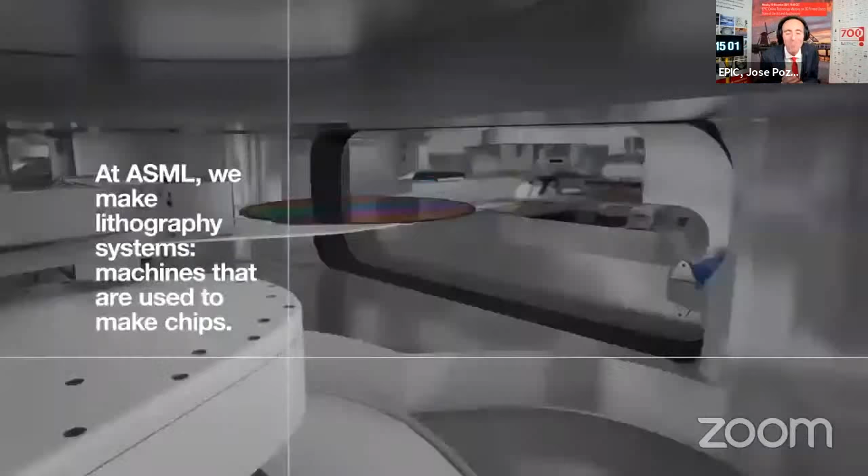ASML is the biggest success story in Europe in equipment manufacturing for semiconductor production. If you want to see how they took the market away from Canon and Nikon, I recommend watching this video. But today, I want to tell you about what I believe will be the next success story in manufacturing equipment, and that is 3D printing of optics.

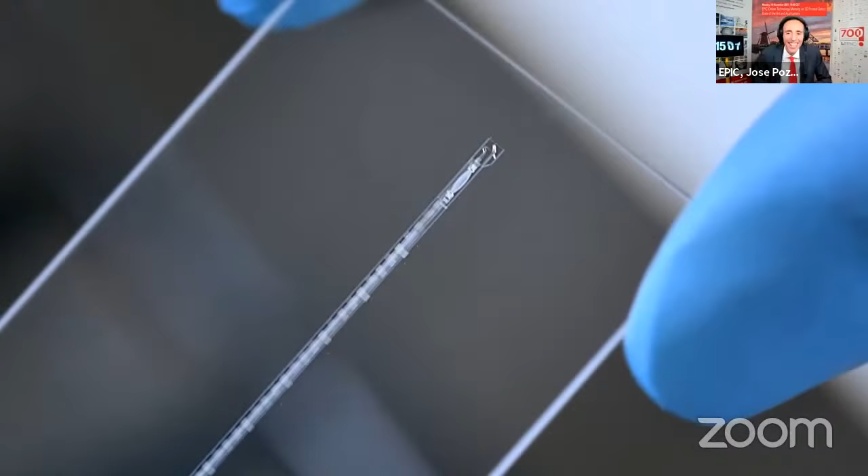Creativity is indeed the engine behind technological evolution. Wise words from FEMTOprint CEO Nicoletta Casanova. The trend in smart devices is smaller, cheaper, with an exponential increase in complexity. It's done by integrating fluidics, optics, mechanics, and electronics into a smaller volume.

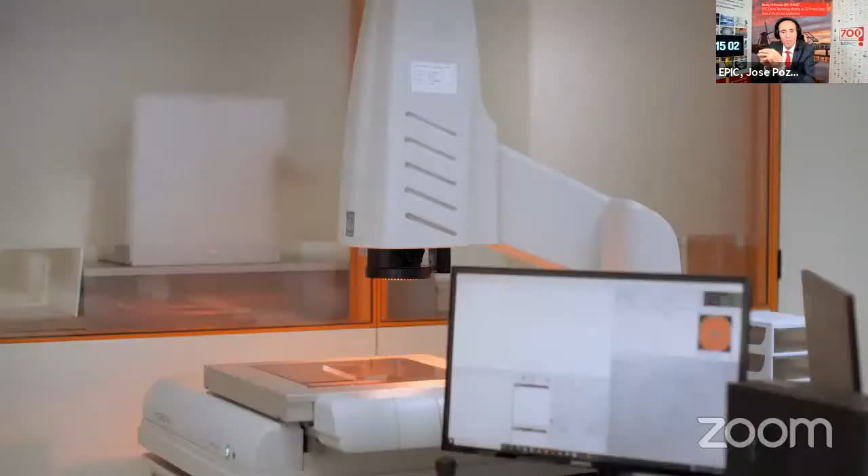But there is a paradox. To produce small things, you need large, high-maintenance infrastructure. Up to 95% of the energy budget of a clean room is simply to control the air. That's incredible. Or maybe not.

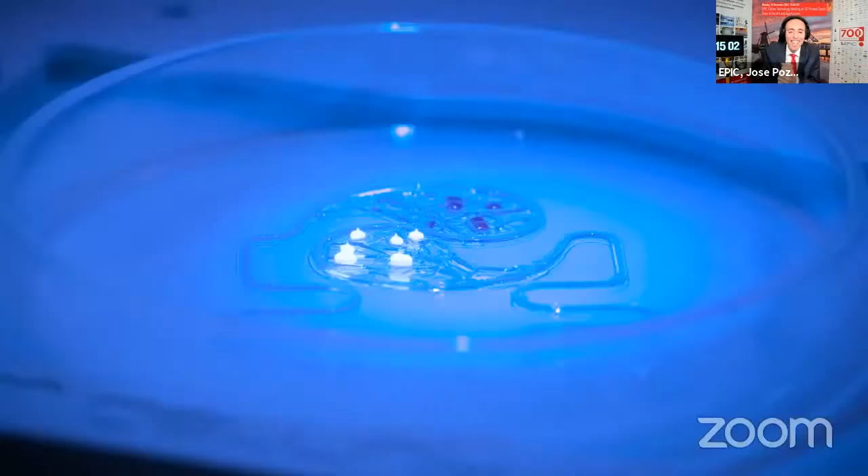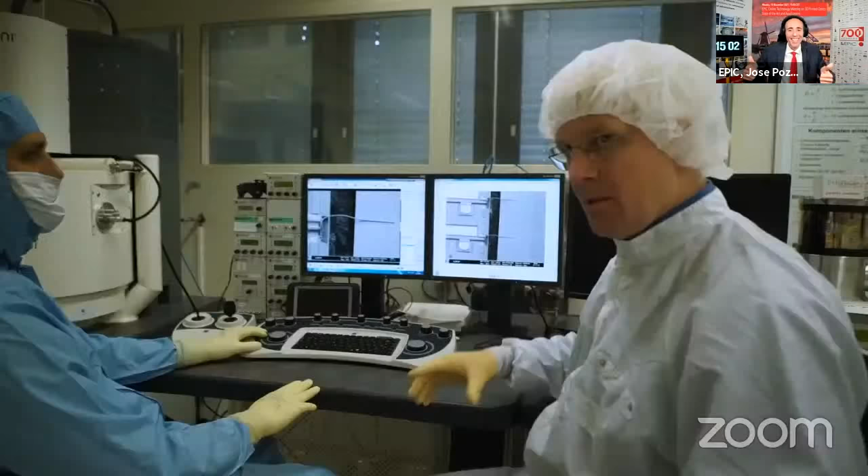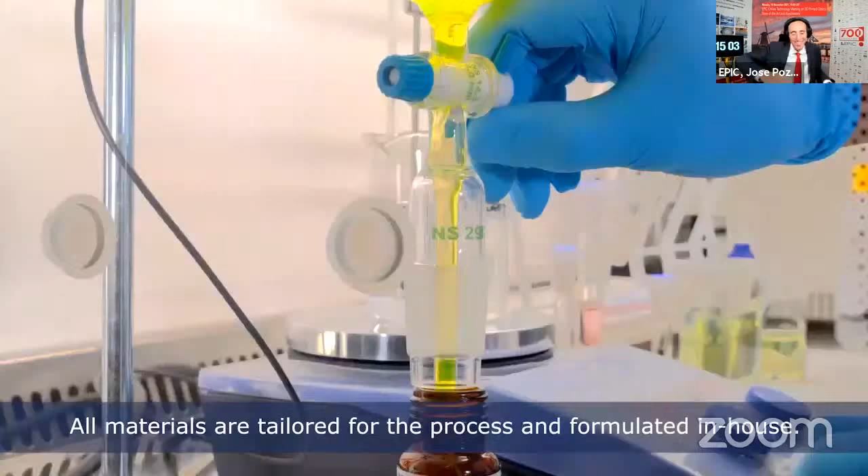On Monday, November 15th, we address the booming field of 3D printed optics. And it really is booming now. Nanoscribe was acquired by CELLINK, a pharmaceutical bioprinting company. Multiphoton Optics was acquired by Heidelberg Instruments in a smart move, having both additive and subtractive manufacturing for microprinting of optics under the same roof. Vanguard Photonics, thanks to the collaboration with Picontech and the PIXAPP pilot line, moved the technology forward for the packaging of photonic integrated circuits, and even newcomers such as the Austrian UpNano have attracted major interest.

And when it comes to ophthalmic optics, another huge breakthrough happened in Europe in 2021. Dutch company LuxExcel started production of 3D printed prescription glasses. Today they are the only company in the world that can do this.

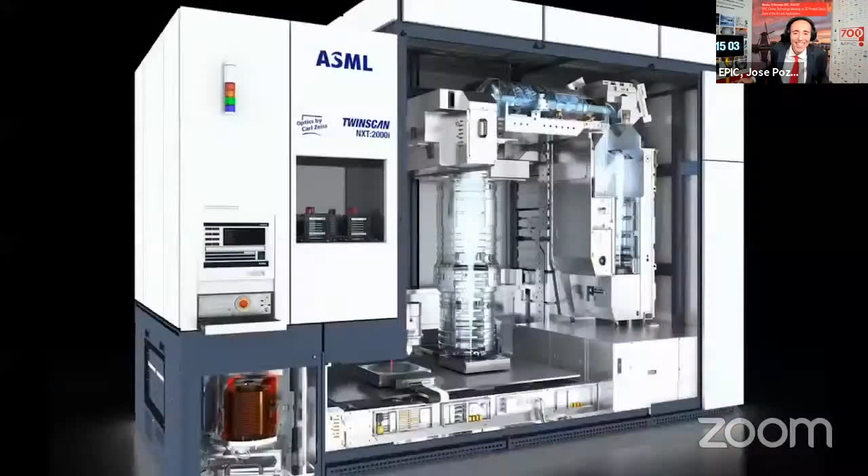But in the same way that ASML's success story was built around cooperation with strong partners, think about the TWINSCAN, the immersion process, or the early move to extreme UV, these companies in 3D printing optics also need powerful partners to enable the next generation.

And here are some of my thoughts. In the two-photon polymerization process, there are two secret ingredients in the recipe: the polymer material and the femtosecond laser used for locally scribing the structures. Tunability of the pulse length and accurate beam shaping have been always items in their Santa Claus Christmas list.

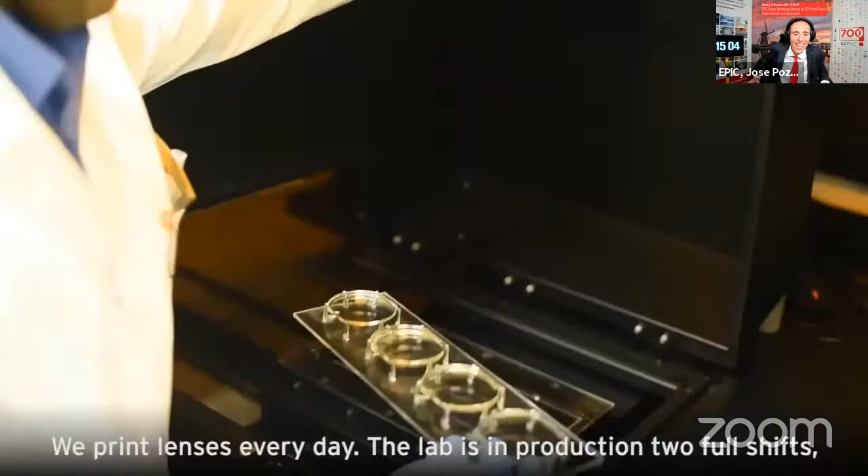And for the 3D printed optics by LuxExcel, part of their success is because of the smart integration with electronics. Look at these electrochromic lenses turning your glasses into sunglasses instantly. Or the integration with augmented reality enabled optical waveguides, so you can have for the first time prescription glasses with augmented reality. Partners are essential for success, and when industry needs partnerships is when EPIC really is epic.

Do you need faster turnaround time, regional production, or prototyping of optics or micro-optics? Do you want to propose your photonic technology as enabler of this success? Do you want to integrate your electronics or fluidics with the next generation optical elements? Or do you want to invest in the next big thing in manufacturing equipment?

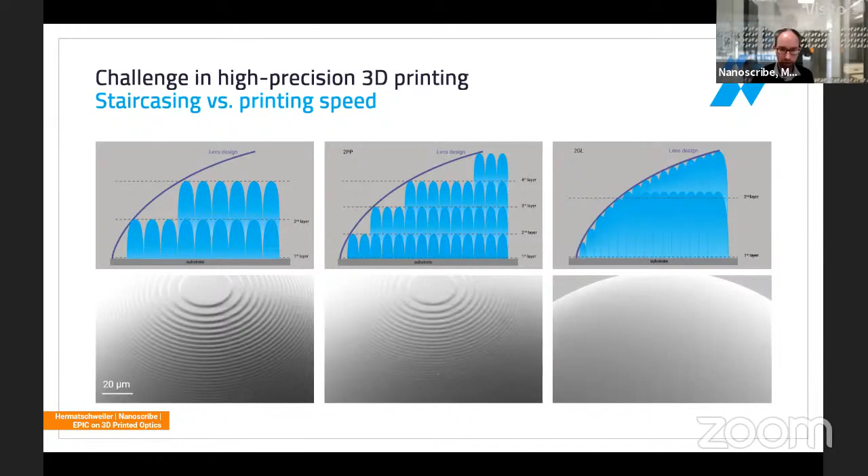This reduces the print time excessively, and results in optically smooth surfaces. You can, for instance, get rid of concentric rings that you typically find when you slice an object, if you have a hemisphere in the center zone, which is the most important zone of a micro-optic. For two-photon grayscale lithography, you can completely get rid of it, resulting in baby smooth surfaces, sub 10 nanometer surface.

So there are 2 topics I would like to talk about today. Mastering of micro-optics is of specific importance - not just 3D printed micro-optics, but also 2.5 dimensional surfaces. The design freedom translates into superior performance because of high design freedom, like higher filling factor, sharp edges, smooth surfaces, and at the same time, you can also realize hybrid optics, so diffractive and refractive combined.

Not only can you do this on wafer level, but you can also do it well aligned on fiber tips, on chips, or on the wafer. Because it's so easy to use, and in most cases you don't even use spin coating and other complex processes, you can realize prototypes easily, iterate fast, and the few process steps involved result in high quality structures, high yield, and great performance.

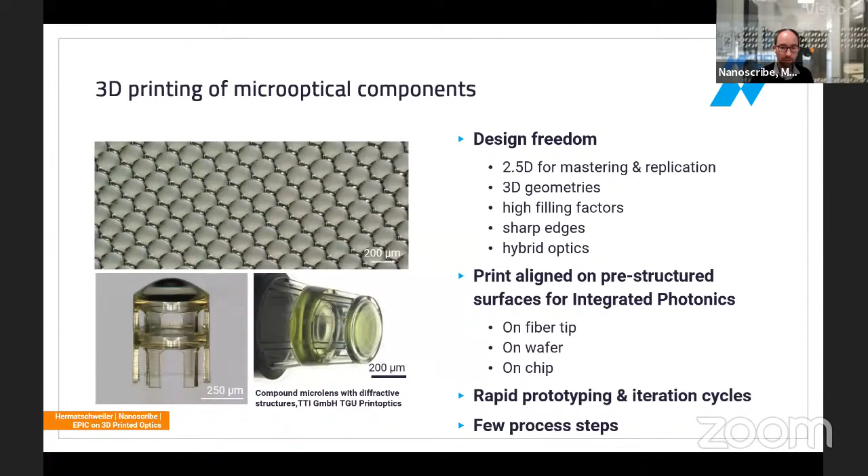So I have brought 3 examples with me. On the left side, you see such an arrangement of a hybrid optics. It's a hemisphere, and on top of it you see fine ripples that diffract the light. Or you can even go beyond the economical compromise of diffractive optical elements, where you typically have only 8 diffractive optical element levels. In our case, due to the superior design freedom, you can go to more than 4,000 levels.

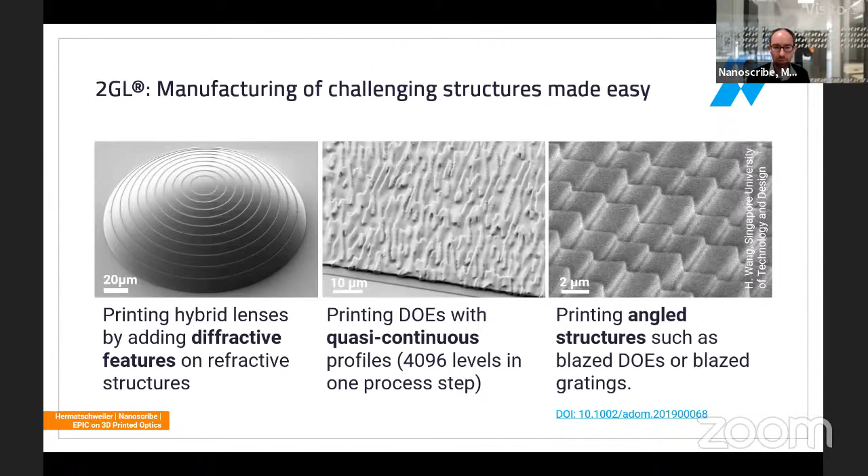This then results in quasi-continuous profiles. Or you can even implement a certain designer angle in order to get rid of the 0th order of diffraction - so diffractive optical elements which are blazed.

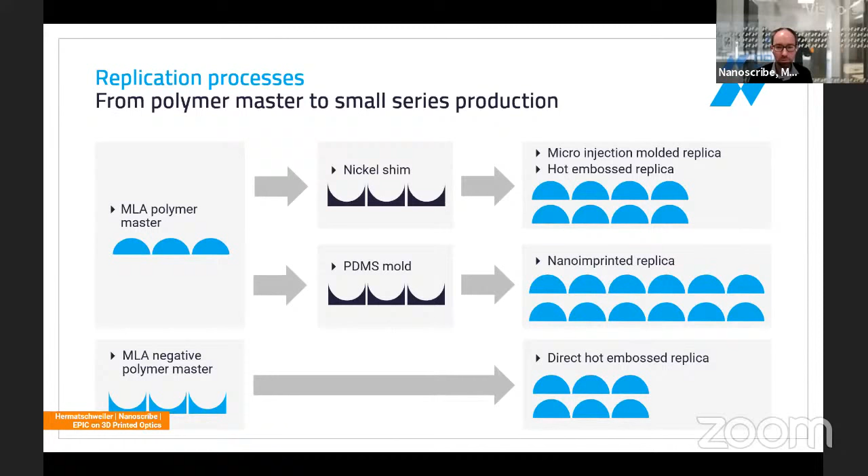This has been done in collaboration with EVG as collaboration partner. This is based on nano imprint replication.

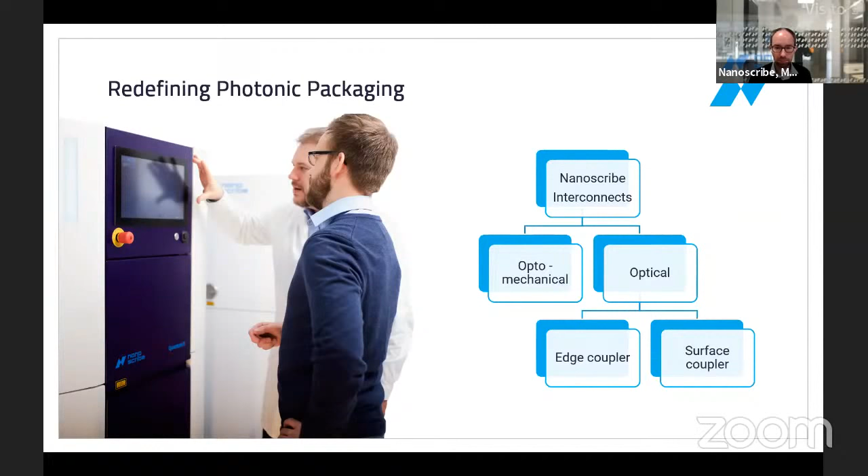The second aspect is not just printing on wafer level, but printing optical devices at the point of destination for photonic packaging. Here Nanoscribe provides 2 major routes. One is to print optomechanical aligners so that you can easily click, for instance, a fiber optic to a certain mechanical alignment element, or you go the optical route and print the optics at the edge of a chip or at the facet of a fiber or onto an optical chip at the top surface.

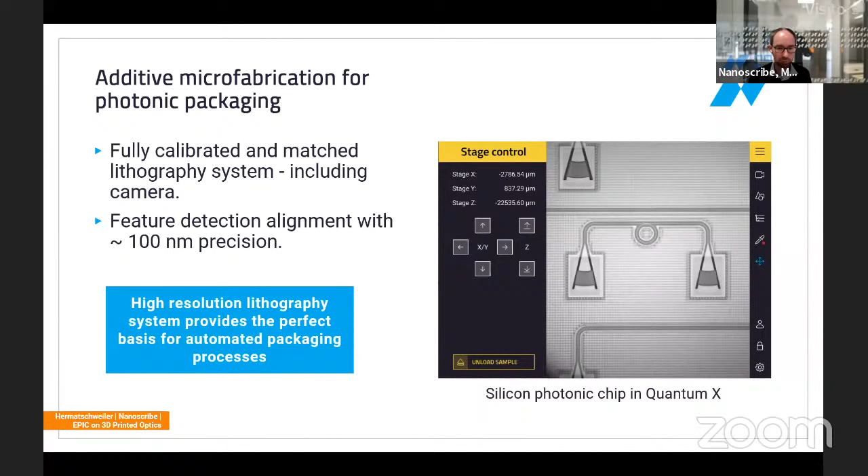This is how it looks like if you take our Quantum X system, the 2-photon polymerization maskless lithography system and 3D printer in one unit. You can see in the camera directly where you want to print, and the alignment allows you to precisely anchor your structure with ±100 nanometer precision to the point of destination. So no complex gluing - it's just printing at the point of destination.

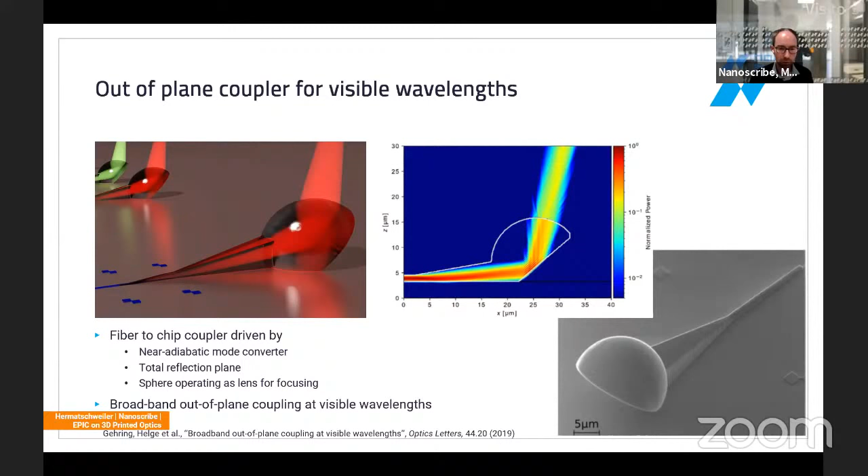One example is from customers from the University of Münster, the Wolfram Pernice group. They, for instance, print things like complex taper structures in order to couple light into this waveguide. Then they have a total internal reflection that reflects the light out of plane, and then a focusing hemisphere with 8 micrometer radius that focuses the light into an optical fiber or vice versa. This is very broadband - it spans the complete visible range at low losses.

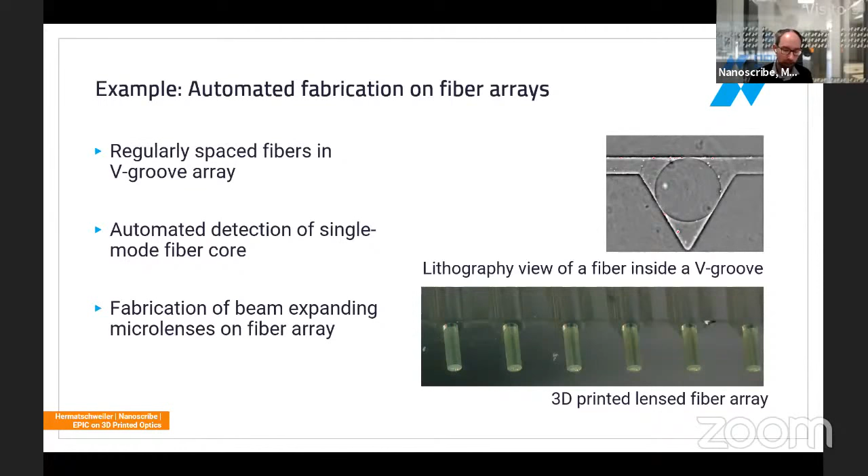Or you can print on fibers and fiber arrays. Here you see a V groove, and our system allows for automatic recognition of the fiber core, alignment, and printing thereof in order to print micro-optics, which relax the mode field diameter.

So to summarize, with Nanoscribe you have the ability to do two-photon polymerization additive microfabrication for micro-optics, which results in superior performance, the ability to rapidly prototype, in a robust and cost-saving manner, and it's also mass scalable by nano-imprint lithography and injection molding.

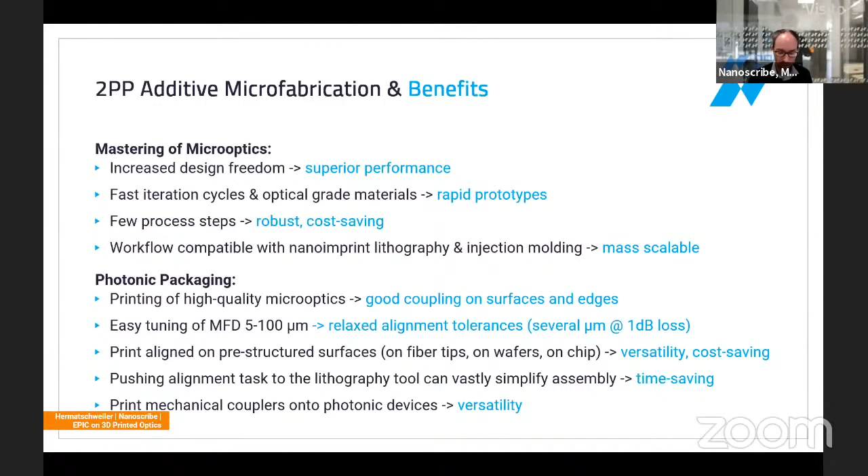And in photonic packaging, you can achieve good coupling efficiencies on surfaces and edges, with relaxed alignment tolerances enabled by larger mode field diameters resulting in low losses and high coupling reliability. It's also versatile - our products allow printing not just on wafers, but on fiber tips and chips. It's also very time-saving, since you can completely skip alignment and gluing tasks. It's a very versatile technology, and if you wish to evaluate it, please send us an email with your design ideas for a feasibility study.

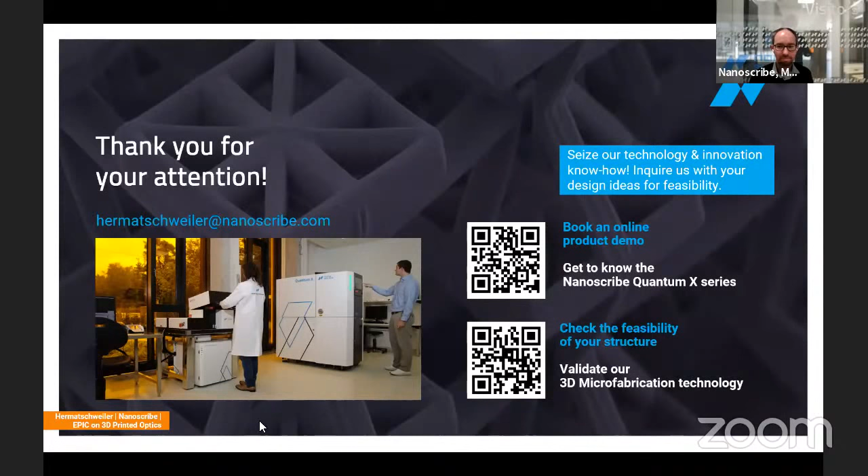Hello, you are one of the people I look up to the most in this industry. It is amazing what you are doing. I want to bring EPIC members in contact with you so it can help you do even better. So you're prepared for this - the EPIC question: what are your new challenges? What can you do for the others, and what can the others do for you?

So what we can do for others is feasibility studies. Whenever you have something you'd like to evaluate, please come to us - do not hesitate. If you're a photoresist manufacturer with specific materials, please consult us, we would love to test your materials. What we can do for you is print micro-optic masters for innovative replication techniques - if you have anything you'd like to test, we print it for you and you can test the replication. Or we can print complex micro-optics to qualify your measurement techniques, for metrology instrumentation for instance.

We have many people in the room I want you to meet, but I'm going to start up there, on the space market. We have one of the companies making a difference in the industry for space technologies - Leontios, representing Leo Space Photonics. I wanted him here because in previous meetings we talked about optics for FSO, free space optical communication, and he's one of the key companies in the nanosatellite business bringing that industry forward. Today, Leontios, we are talking about 3D printed optics - what is your interest in that topic, and what challenges do you have for your space applications?

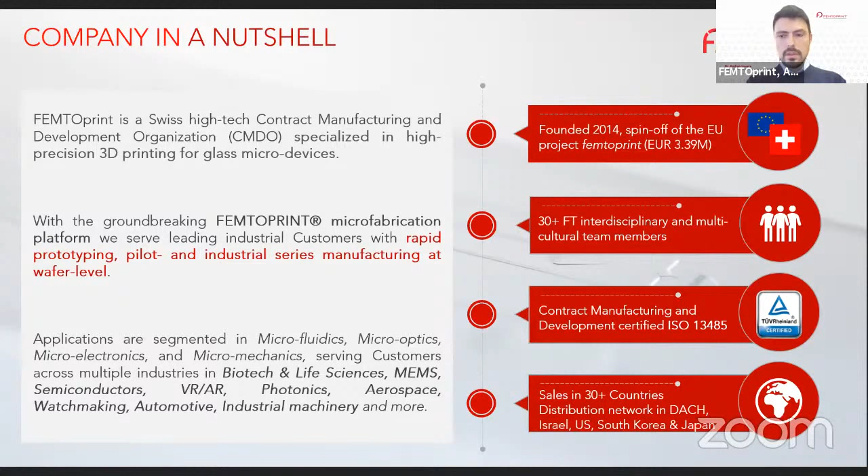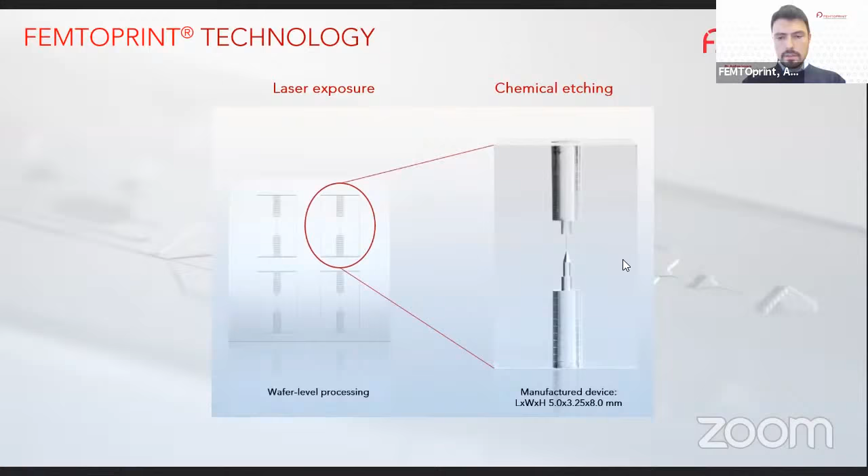Our main material for optics is fused silica, and there are many advantages for using fused silica in optics. For example, it's UV transparent, and there's a transparency window which goes very nicely into the IR. It's stable, can go into very harsh environments, is biocompatible, therefore elements can also go into a human body or be used in lab-on-chip applications, for example.

And the fabrication can, of course, be done at wafer level scale. Here we see an 8-inch wafer. These are just holes, but in the same area and surface we can basically produce any type of components. What is also, I think, amazing of what we do is that we can achieve very, very thick parts. Here we can reach 20 millimeters in thickness.

Aside from the main technology, we have built over time many other post-processing methods that help us tackle different markets, like a surface polishing method that allows us to really reach the optical market by improving the surface quality of the produced components. Then we have encapsulation technologies, we can modify the refractive index of the materials, drill holes. And more recently, we are also handling metals to create electrodes in 3 dimensions and other types of functionalization through partners.

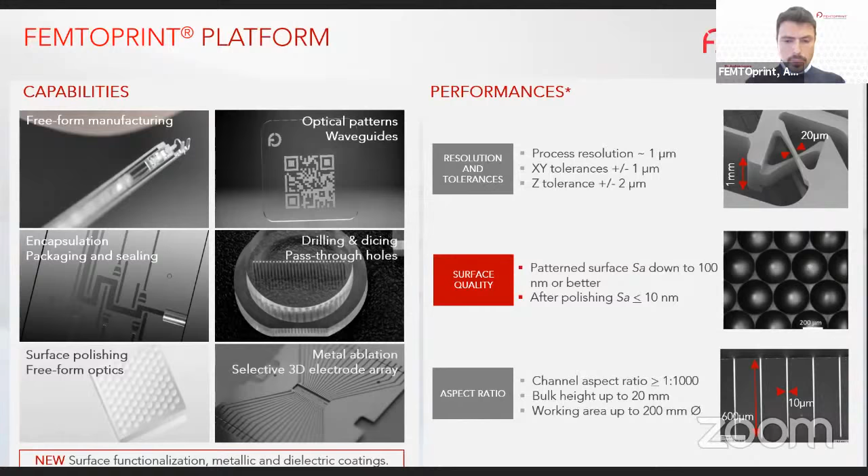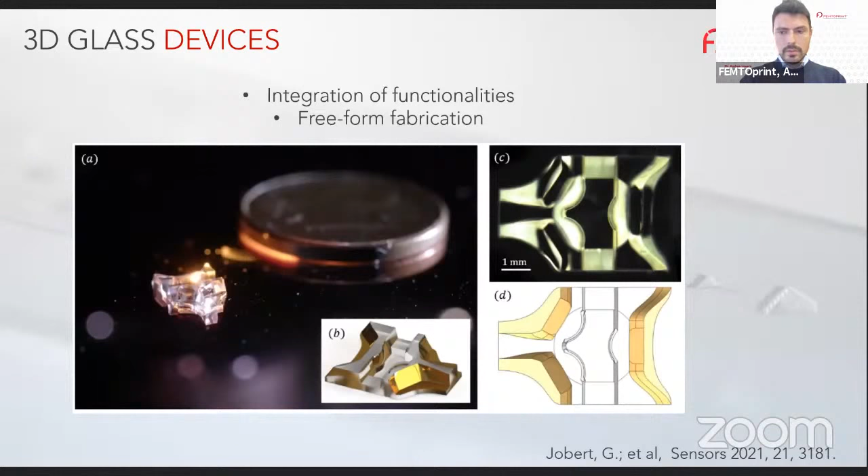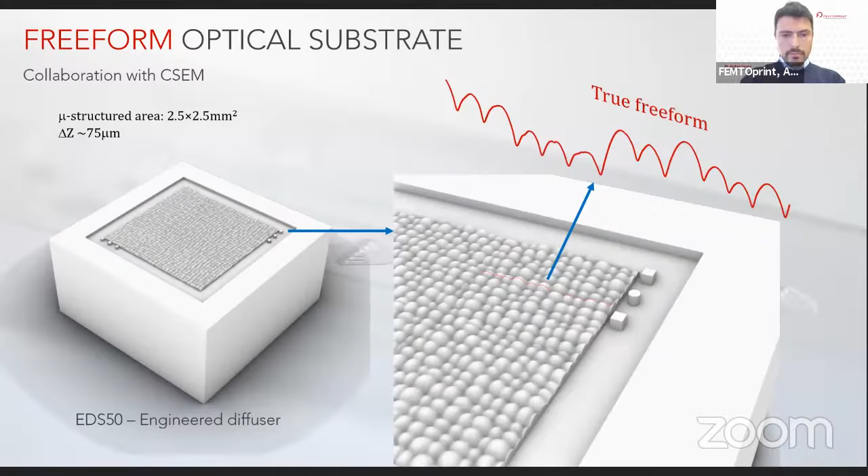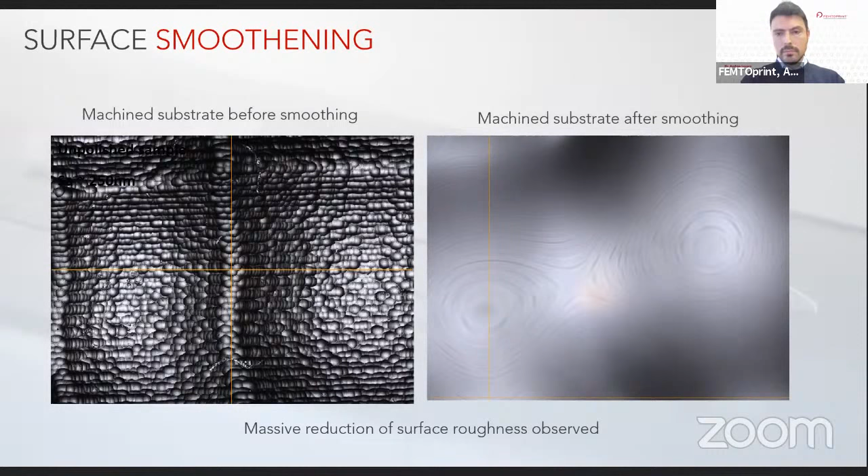So because I knew you were going to ask the question, what can you do for us? I think we are really looking from the market. We are really looking for partners to bring ideas and devices to the table to develop together with us.

What we can bring is our expertise in producing components from micrometer to several millimeter size. We are comfortable working with typical feature sizes between 20 microns and 1 millimeter. We can decrease surface roughness below lambda/10, average roughness below 20 nanometers. We can keep shape accuracy below 1.5 micrometers compared to the 3D model. And we are comfortable producing curved shapes using our localized polishing process.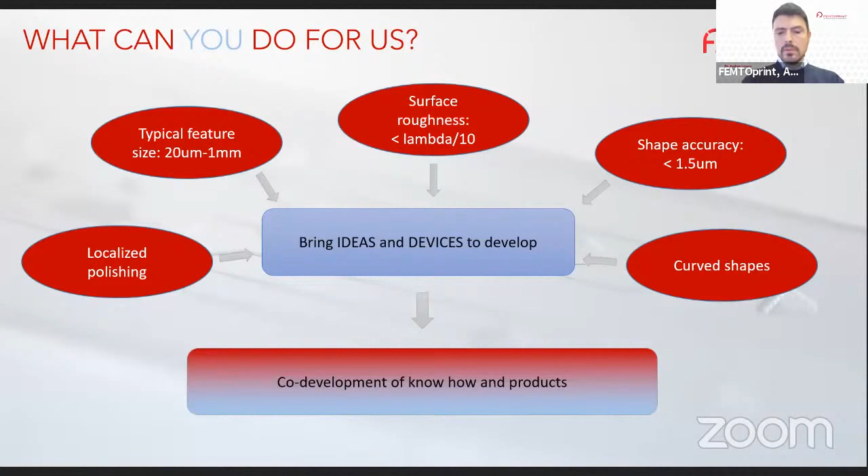What we really hope at the end of this meeting, but also for the future, is to find good partners and customers to co-develop know-how and new products.

And what can we do for you? We offer a flexible 3D technology which allows us to operate in different markets. Our main offer today can go from fabrication of masters - I think we heard a lot about masters in the previous presentation. We have demonstrated with a few selected customers that our technology is compatible with replication for injection molding machines and other technologies. But at the same time, we can offer fast prototyping, small volume production, up to mid volume production of optical components and other items.

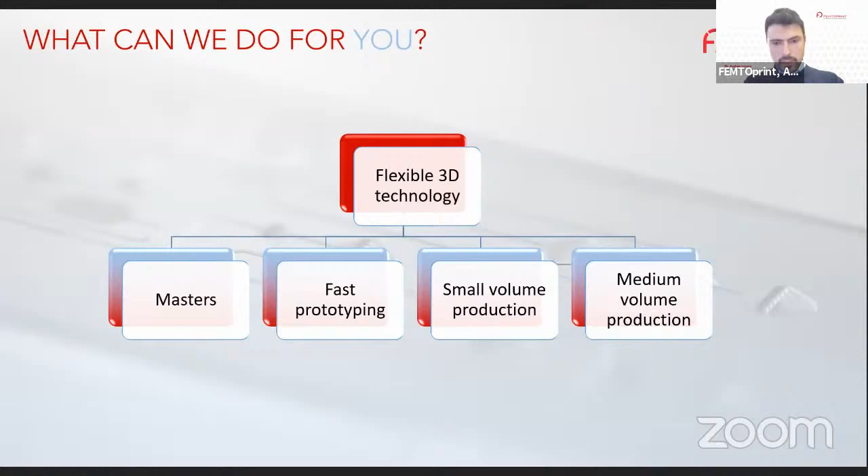And with this, I'd like to thank you for your attention.

Thank you very much for a great presentation. I'm still puzzled about when to use glass and when to use polymer. To be honest, there are so many industry trends that it's hard for me to summarize in a sentence. I don't think there is a clear answer for that. Luckily, we have lots of different end users with different challenges when it comes to what material to use.

So I want to bring to the attention a few end users that we have in the room. I'm going to go first to MBDA. Kwong Man, good afternoon, all the way from the UK. MBDA is a company in the defense sector. We all know the company MBDA, and you know what your business is. What is your interest in 3D printed optics? And when do you target polymer or plastic, and when do you target glass as the material for those optics?

Hi. And if you have any slides to share with us, now is also a good time. Yes, I'm just going to share that. I've only got a single slide, but hopefully you should be able to see that right now. Can you see that? Let's see. Yes, go to slideshow mode.

Excellent, okay, that's brilliant. So MBDA's interest in metamaterials - we've only started engaging with you guys on metamaterials recently, but briefly, MBDA is a European complex weapon prime.

My name is Kwong Man, and I'm the EO sensors technical expert at MBDA. MBDA is the primary missiles company in Europe. We use imaging infrared technology predominantly in missile seekers, but we're also interested in the technology for signature control. As we develop systems for the future, the requirements become more demanding and require increased design flexibility. This could be to fit into smaller spaces where the overall size of the missile is reduced, or to fit into unconventional spaces, as in the case of multi-mode seekers. Metamaterials can help us deliver this challenge, as they have the potential to reduce the number of lens elements and operate in confined spaces.

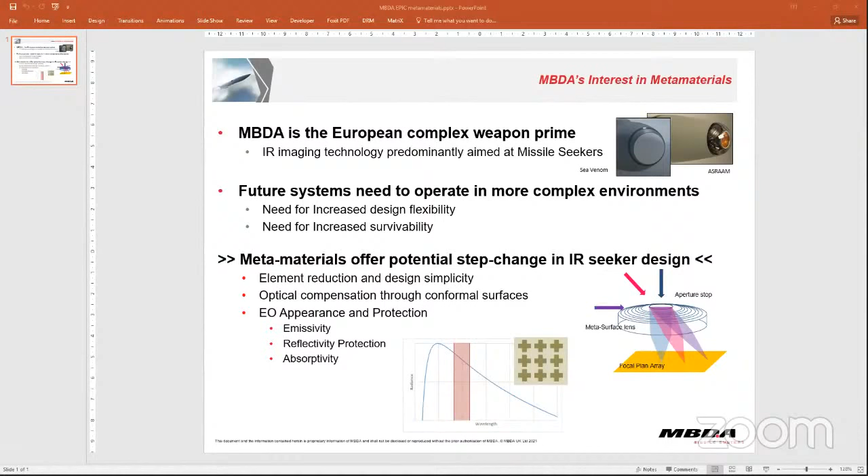These are the fields that the EO Sensors department imagine that metamaterials can provide some benefit for in the future. There may be other areas that metamaterials could be applied in other technologies and departments.

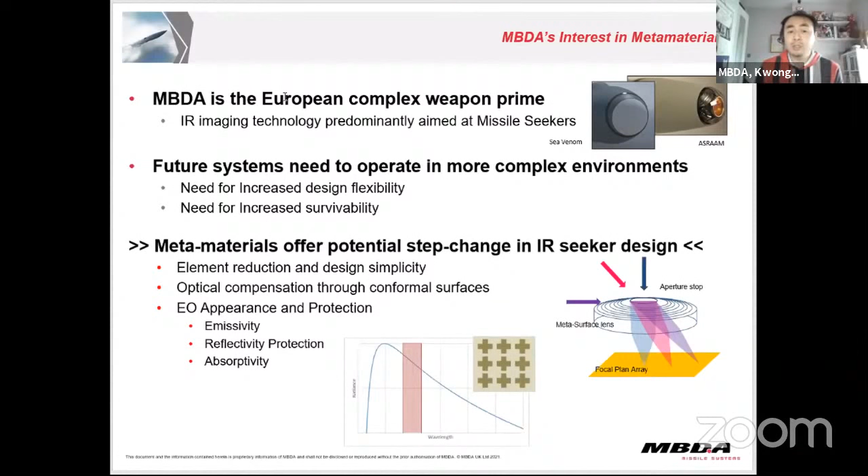If you have any thoughts about this or any questions, you can contact me directly. That's all I had for now. If you have any other questions, please let me know.

Well, you have a lot. I love when an end user comes to the meeting with a particular challenge.

Who can help? Let me see. I have some hands up. James Field from Nanobox, how can you help?

Well, we've made imagers for missiles where we've printed right on the image sensor itself. That was field trialed, going through shock and vibration, the heat, humidity, so that they're used in the services, or beginning to be used in the services over here. And we do control permittivity of material sets for cloaking radar images and the like.

So I will send you some presentations, Kwong. Please, that'd be great. Thank you.

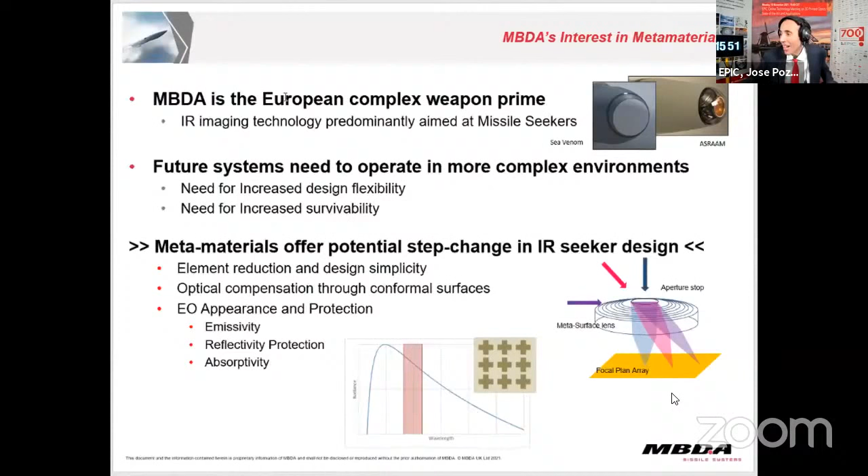I think many of you are already telling me that they want to help, but they don't want to talk publicly. So I think it is okay that we leave this as introductions offline. I know that the topic is the defense, and it's better to have the introduction and discussions offline. So don't worry, I know many of you want to help. Let's do the introductions later.

I want to comment, I want to bring to the discussion, because we have a person from the automotive sector. We have Lionel Guillot. He told me it is too early to speak about my challenges. So I just want, because this is, of course, a meeting, not a webinar, I want Lionel to say hello to us, and I want to ask him what brought him to this meeting.

Lionel Guillot representing the automotive company Renault. Lionel, good afternoon. Hello, good afternoon. Thank you for giving the micro. Just to say, this is an early participation today.

My interest is for functional surfaces, whether it's for optical aspects or photocatalytic aspects, and any aspect that we could imagine in a car for functional surfaces.

So today I'm learning, I'm listening and learning to you, and that's very interesting. I thank you a lot for these speeches. Thank you very much, Lionel, for that.

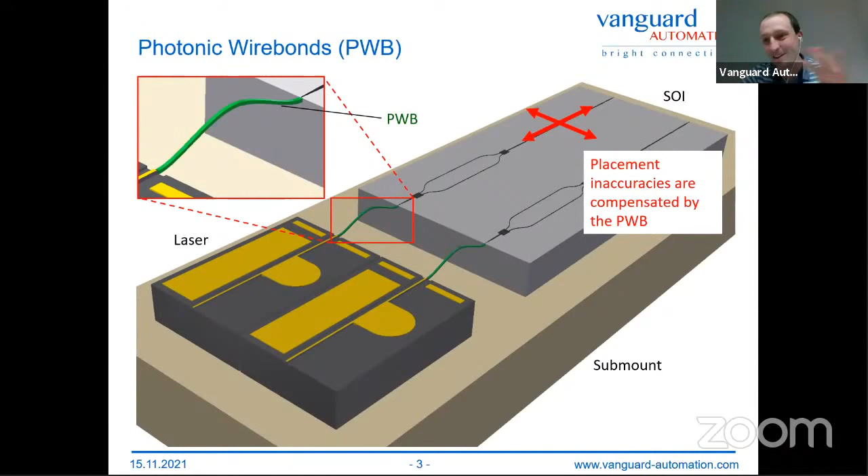In a subsequent step, we clad these interfaces with a low index polymer. That's first of all for single mode operation, since all we do is single mode operation, and secondly to be reliable and pass Telcordia tests and so on. I'll talk about this again at the end.

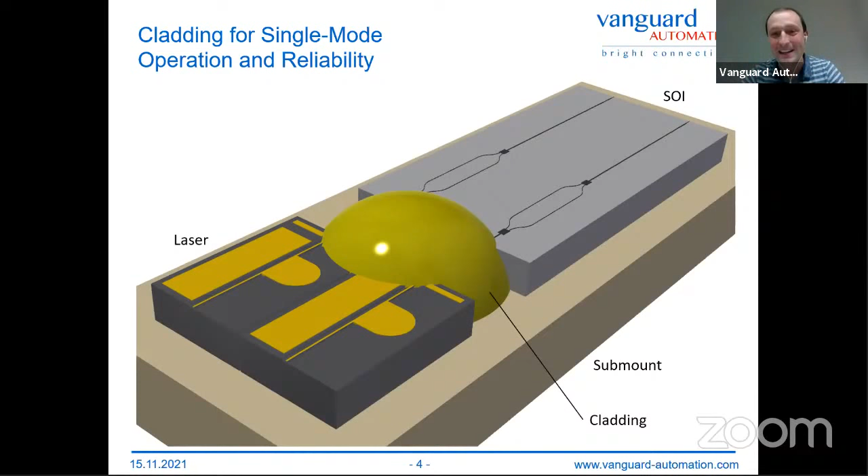So how does it work? This is the engine of our process, but it's just a small part of it. It's a 3D printing process, also known as two-photon polymerization. What we do is take an objective lens up here, and we have a femtosecond laser beam that can focus into resist and polymerize it.

With this objective lens, we look at our laser and our chip, and localize it with sub-100 nanometer accuracy. We automatically calculate the trajectory that connects these two chips, and then the machine does everything else itself. That can happen in quite attractive cycle times for many applications.

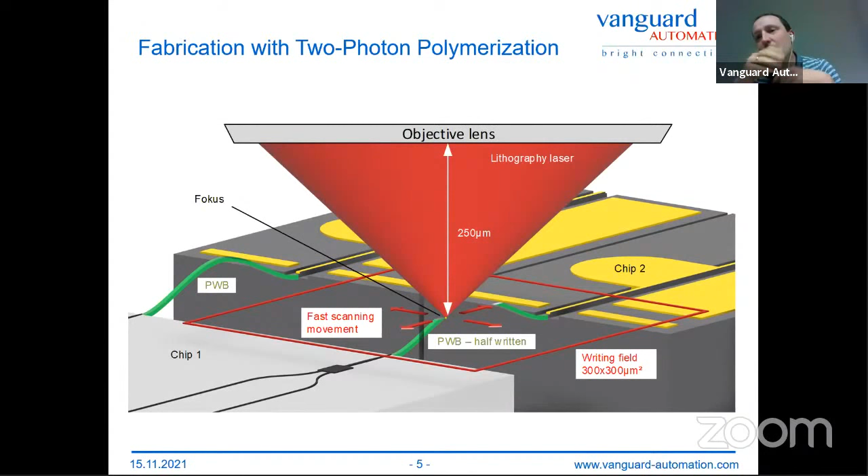And we supply the whole process. We don't give you a 3D printer. We sell you a process that connects optical chips.

Just to give you an example, on the left side you can see here in green a photonic wire bond connecting an SOI chip on top with a laser. This is 20 micrometers, so it's maybe 250 micrometers long. If you look carefully, it's compensating some lateral misalignment, which would otherwise lead to incredibly high coupling loss. With this we can typically achieve about 2 dB, which is a very reasonable value, and we can go lower in some situations.

So the performance is really attractive, I believe. Of course, our technology can also be applied to any other optical component, like a PLC photonic chip here that is connected to a single mode fiber. If you look at the chip and the single mode fiber, you see a taper structure - the photonic wire bond is getting bigger. You can have nice mode matching to pretty much anything, which gives you very low coupling loss.

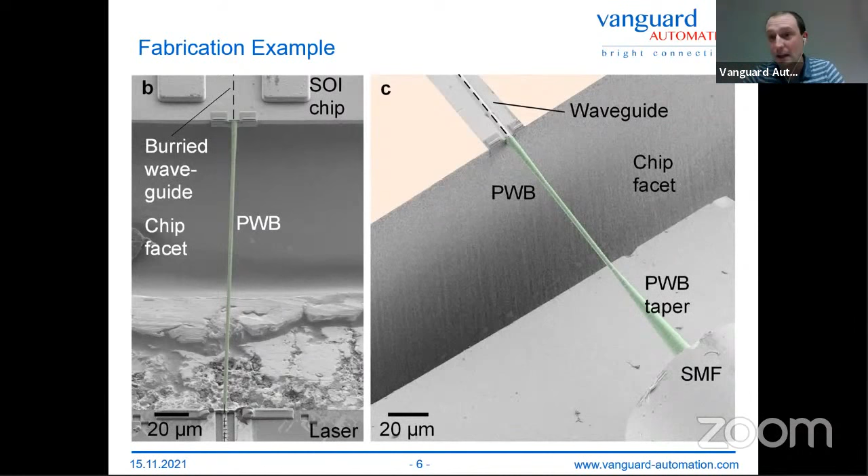Now, with that said, we cannot only print photonic wire bonds. We can also print 3D lenses, for example - you can see them here. Our main value proposition is that they're reliability tested.

I'm absolutely a polymer person in this polymer versus glass discussion, because we can make polymers reliable. They have the key advantage that if you print them onto something, they don't shrink. We can pass Telcordia tests with shrinkage well below 1%, like 0.5%. So it's really, really accurate.

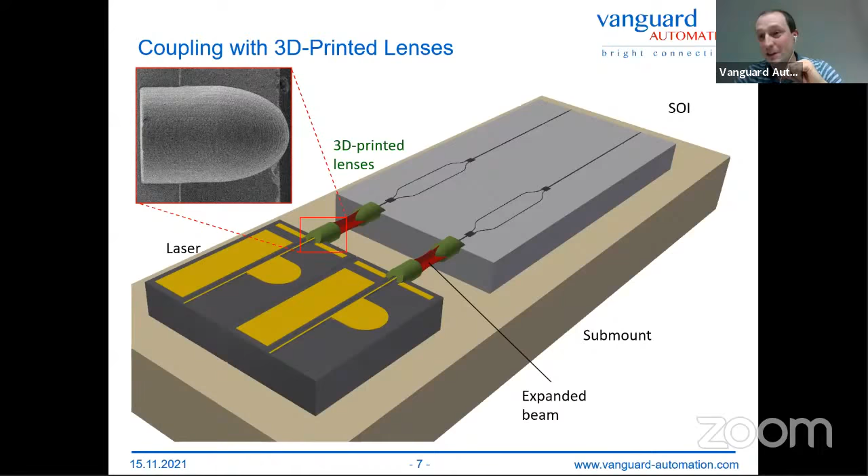We can have plus minus 50, 100 nanometer surface accuracy. We can have sub 10 nanometer surface roughness. So the performance is really superior and at the same time very stable. Even for space applications, we're close to NASA specs, to NASA outgassing specs.

Now this is our key product. That's the Sonata, a 3D printing machine. It can handle big wafers, 12-inch, and it's a fully automated system.

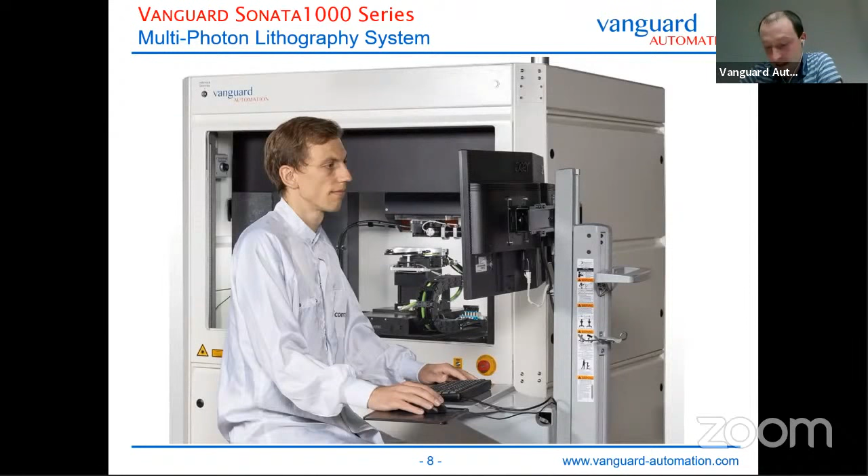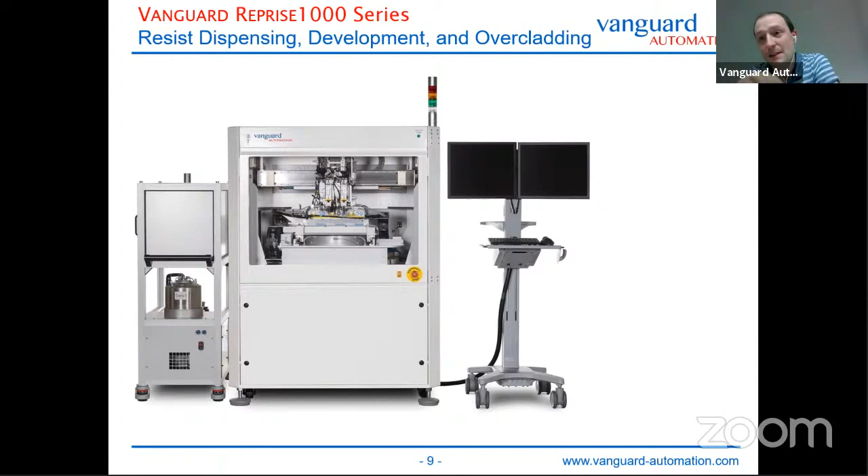But that's not the only thing that we sell. We actually sell the whole package. We also have a system which takes over the dispensing, the development, and the cladding of the photonic wire bonds. This device is called the Reprise, and this allows you to insert sample chips. We do the 3D printing, the resist dispensing, the development, the cladding. We give you the whole process. You do not need to establish the process of 3D printing the optical elements yourself. We give that to you, so you can start fabrication with our devices.

Just to give you an idea how the final interface can look like, here you have a single mode fiber array on the bottom left. It is a PLC chip. The machine does the cladding, you can see that here, and it automatically encapsulates everything and makes sure your devices are reliable.

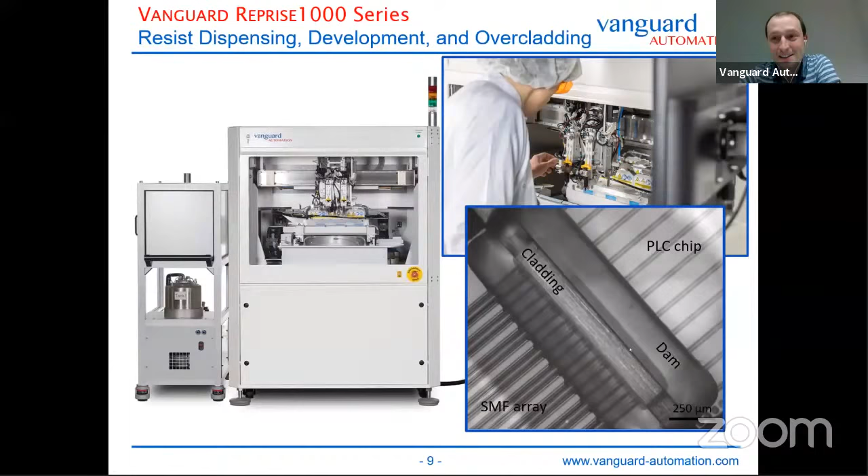So to sum up, our product is an assembly line, or a combination of machines, processes, material, software, everything you need to connect optical chips.

We have typical performance of, say, minus 30 dB return reflection, that's important for lasers. We have tested many devices for 85, at minus 40, 80, typical 85, actually typical Telcordia specs. Lenses have gone through high acceleration, reflow soldering, gold soldering, and so on, cryo operation, and even high power operation.

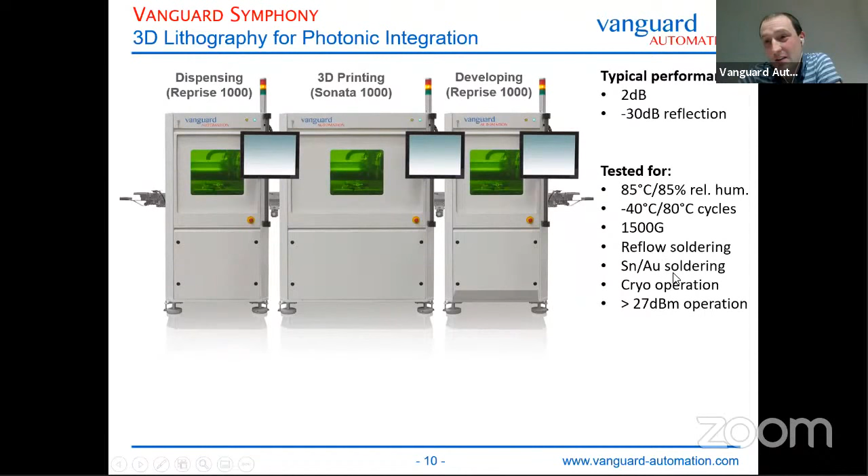So now to actually answer the most important question of this talk: what we offer is laser chip to single mode fiber integration without active alignment. So solving a huge challenge, I believe. What we're looking for are customers that are willing to adopt our technology. We are demanding on rethinking your fabrication process, but I think we can solve a very, very important challenge of photonic integration.

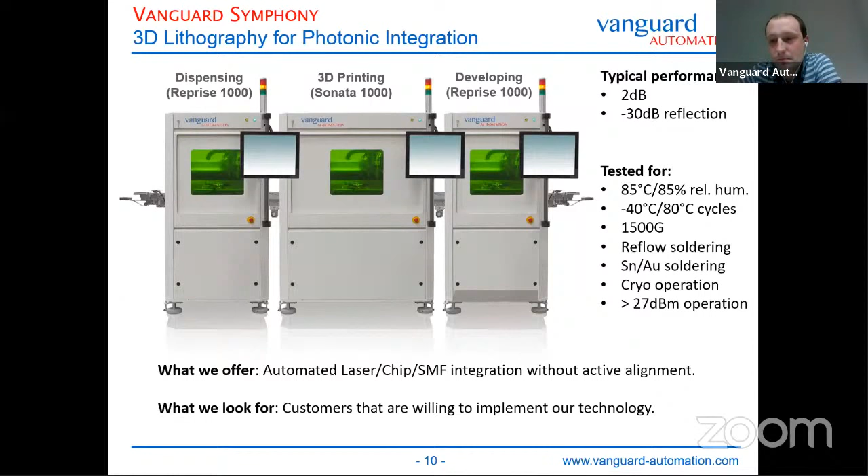I have to ask you, because we've been talking to you and to Christian Koos already for many years, about how to bring the photonic integrated circuit community to interact. I know that the collaboration with ficonTEC and your introduction in the PIXAPP pilot line have made a difference. What is the current scenario? How do you define the technology readiness level for packaging photonic integrated circuits with two-photon polymerization?

What we can have is demonstrator assemblies, reference assemblies that show how the technology works. That has also undergone Telcordia tests, and that's a typical TRL6 level, the level until we qualify products. Of course, customers that already have our machines are going further on this. We've given them the process, and they're implementing it into their product, their building system, and this is moving away from 6. But 6 is, I think, a tested or a prototype in the relevant environment. So that's what we can give you.

I bring to the debate Martin from Nanoscribe and Willy from Multiphoton Optics. What is the current scenario? Is this a technology for prototyping, or do we believe that we can go into production for the packaging and fiber to chip assembly of photonic integrated circuits?

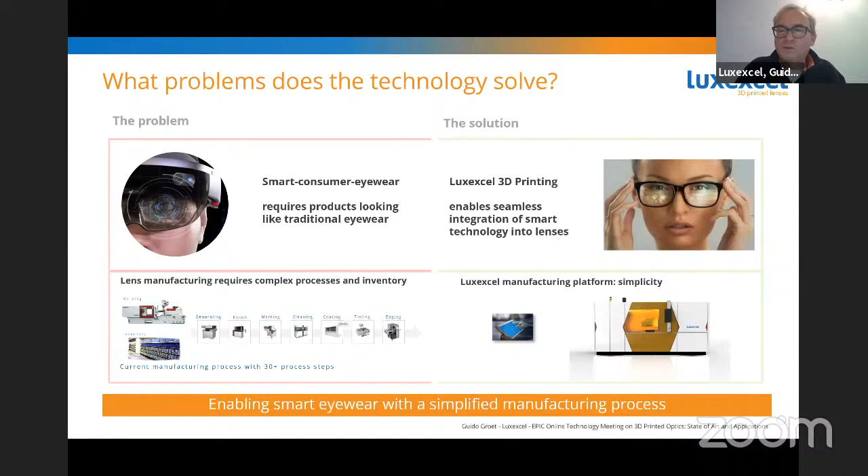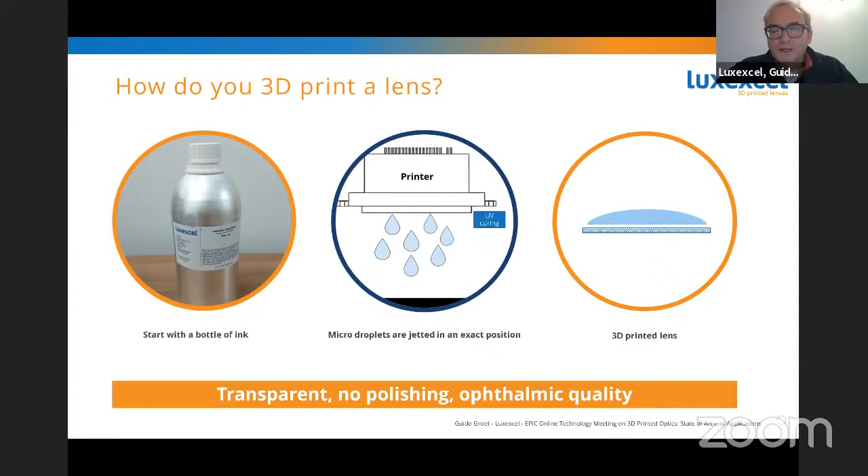How do you 3D print a lens? Well, I simplified it here. So basically, we start with a bottle of ink. The machine makes tiny little droplets, very small, in the picoliter range. We deposit them exactly where they're needed, and then we cure them in place. We don't cure them fully, we partially cure them so that they integrate with the other droplets, so that you get a fully transparent lens that does not require any polishing and is ready to be used once it comes out of the printer. Yeah, in a nutshell, that's what we do. We make very small droplets.

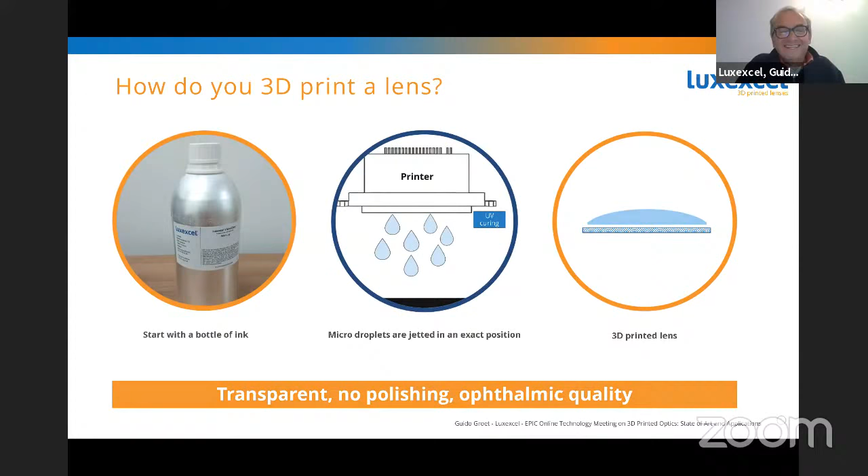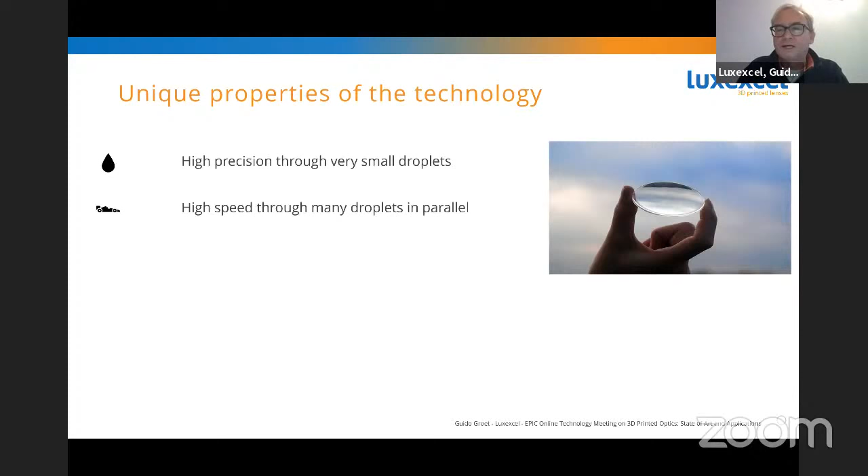So the reason we're so precise is we use very small droplets. The reason we achieve high speed - to print a batch of lenses takes about, depending on the prescription and other variables, roughly between half an hour and an hour.

That's because we massively parallel deposit these droplets. The other great thing about the technology is because we use droplets and let them flow, you can imagine they become perfectly smooth. So we achieve a surface roughness in the 5 nanometer range, very smooth without any polishing, which is a great benefit, not only because it simplifies things, but also because it doesn't damage a smart device integrated into the lens since there's no force applied.

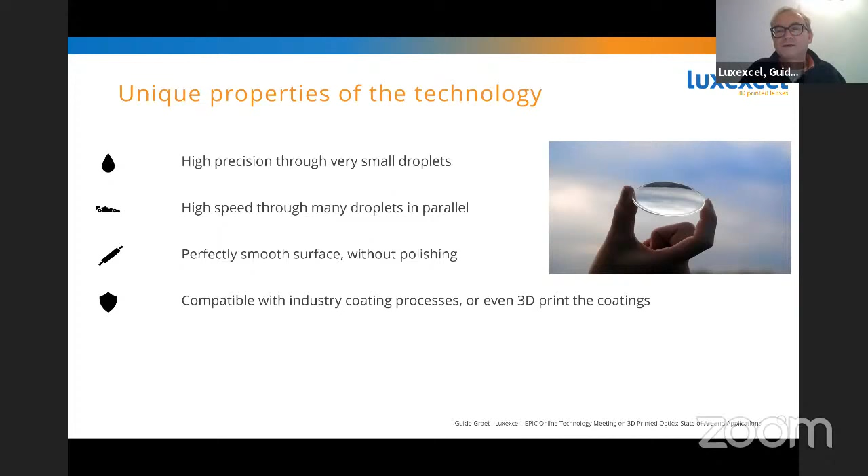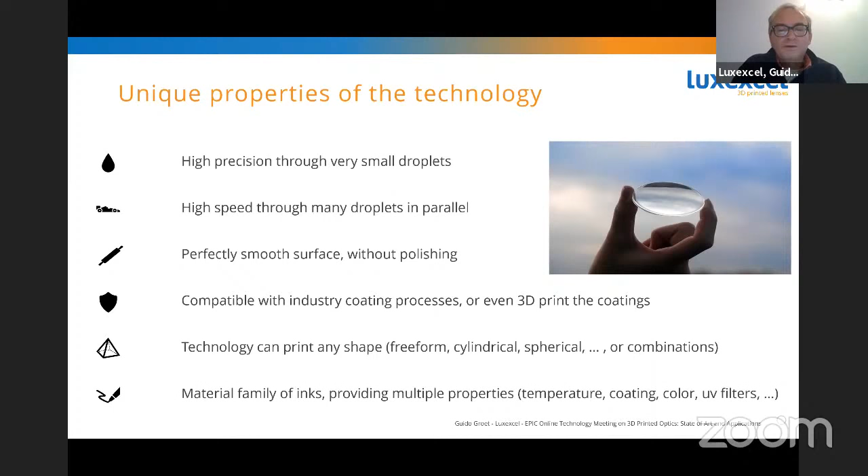Also, because we use these droplets and do this at close to room temperature, there's no stress applied to the lens, so it's a very usable lens straight out of the printer. Our technology and material are compatible with all kinds of industry coating processes, but we can even print coatings. We can make all the usual shapes and many others because we build the shape as we go, and we have a family of materials that apply to different applications.

How do you integrate smart devices? What we do is print the front with the power, the back with the right optical powers. We can even create air gaps if the application requires one, or print straight onto the waveguide if that's possible. We can print the mountings for the light engine, providing a fully integrated device straight out of the printer, ready for the light engine to click on.

Which is really our biggest benefit - that with our technology, you can make a thin, lightweight, small device ready to be used without any stress, with the mounting attached.

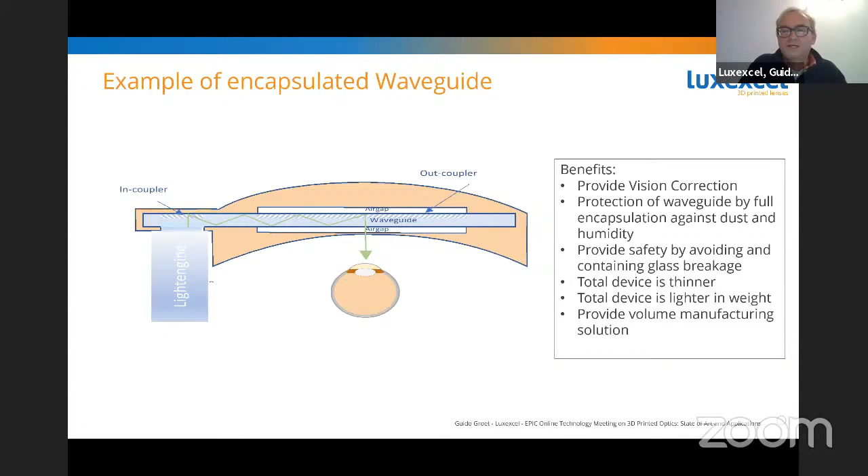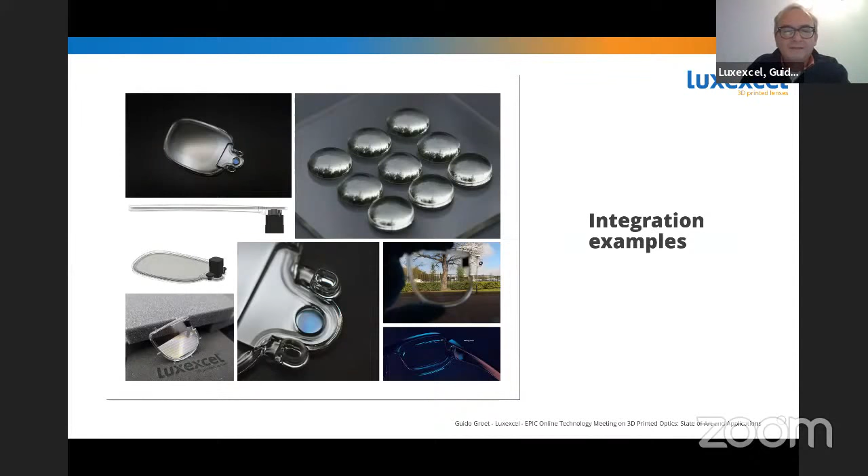We can also print all kinds of other shapes, like these micro lenses on the right top. So with our technology, you can really integrate anything you like into a lens, which is a great benefit for smart eyewear.

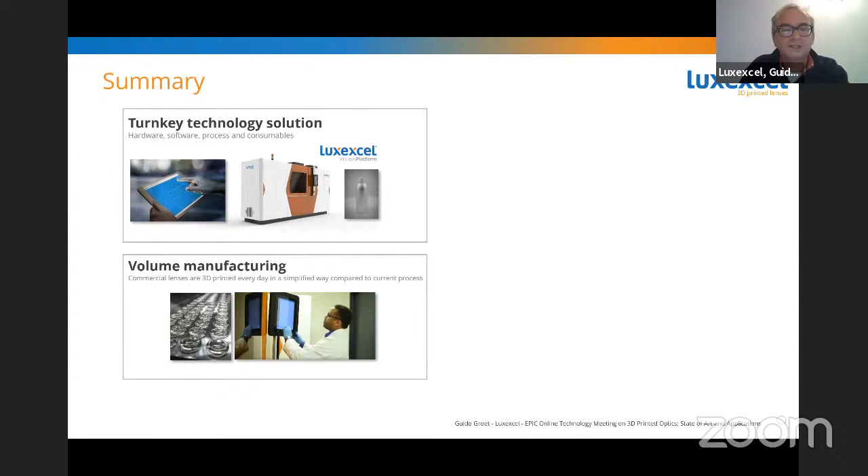Our technology is really a turnkey solution - one printer, materials and software that come with it to bring together the process. We work with all the big tech companies looking to make smart glasses, as I mentioned earlier. We have customers producing this in volume with our technology, so it's a proven volume technology.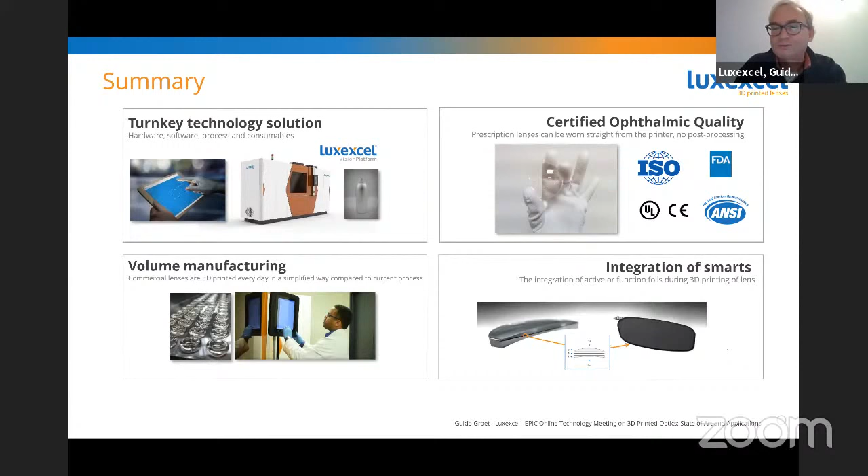It's certified, which for ophthalmic lenses is an important aspect. And we can integrate pretty much anything you guys can come up with - though maybe I shouldn't say that in this audience, since I'm sure you can come up with something that offers additional challenges. As far as we know, we're the only ones able to do it this way.

Like Rolf was saying earlier, you can of course glue together traditionally manufactured lenses - that's possible. But I believe you cannot achieve the same thickness, weight and integration that you can with our technology. That's in a nutshell what I wanted to tell you guys, and I'll be happy to take your questions.

Guido, from the bottom of my heart, congratulations. This is a success story in Europe, and you have for many years been interacting with many companies to make it happen. Today you have the services, and through very strategic cooperations, you have managed to reach some of the markets. Some of these strategic cooperations are actually public, so I don't know if you want to mention some of them.

It's a strategic cooperation that you are exchanging to address this huge market, which is ophthalmology. Well, I cannot disclose the names of our customers. These are big tech companies working in smart eyewear, names you're all familiar with, and they're extremely secretive. They ask us, as a security measure, not to disclose their names. However, on the supply side, we work together with a number of waveguide companies and other companies in this space.

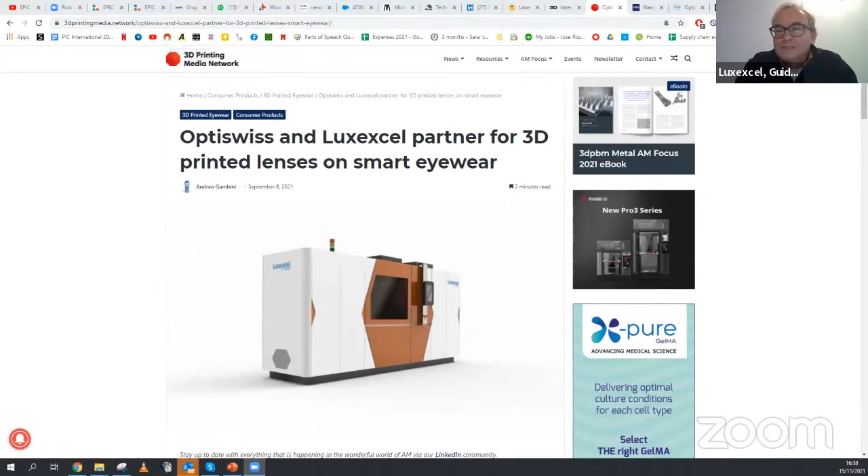The only customer I can disclose is OptiSwiss. And OptiSwiss is an ophthalmic lab in Switzerland that we work with. They use our technology to help some of our customers with prescription smart lenses.

We have a lot of discussion to do with you in the next 20 minutes, so please be ready. Let me start. There's a company in the room that is in stealth mode, and they asked me to read the question for them. Guido, what is the maximum resolution you can print at, and can you print blazed gratings, and at what scale? That's a very specific question.

We can print very small features. We have an application today for a customer that needs very small dots on top of a lens, which can be in the 20 to 30 micron range. That's the smallest we can go and still achieve good optical quality.

We can print all kinds of different features with this technology. Our strength is to make lenses that are bigger and look like ophthalmic lenses. Our goal is not to make the smallest possible lens. Our goal is really to make ophthalmic prescription lenses and integrate smart devices into them.

I will discuss this with him later on, but I want to understand a bit - are you doing only ophthalmology, or are you considering perhaps opening up a new area of activities?

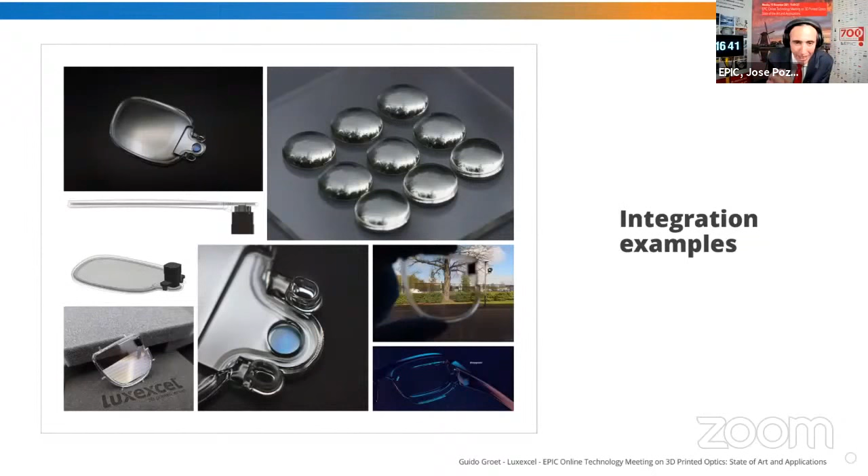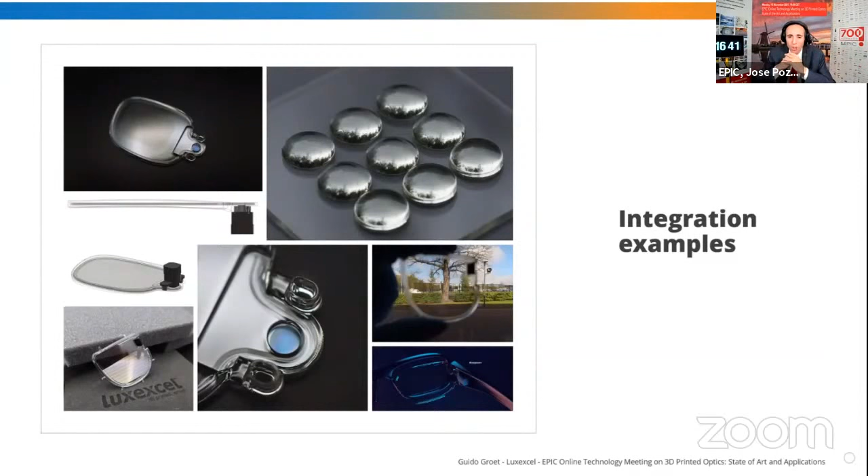Earlier in the meeting, we wanted to address a topic we didn't cover well yet - the topic of testing. In the markets you are targeting, very often you have to go to high volume production. We have in the room somebody from the company NTS Optel. Frank, are you with us? Yes, I'm here. We just heard that they are very selective on the applications they target because they have to enable high volume production. What do you bring to the table? And Guido, what activities do you do for volume testing? First Frank, then Guido.

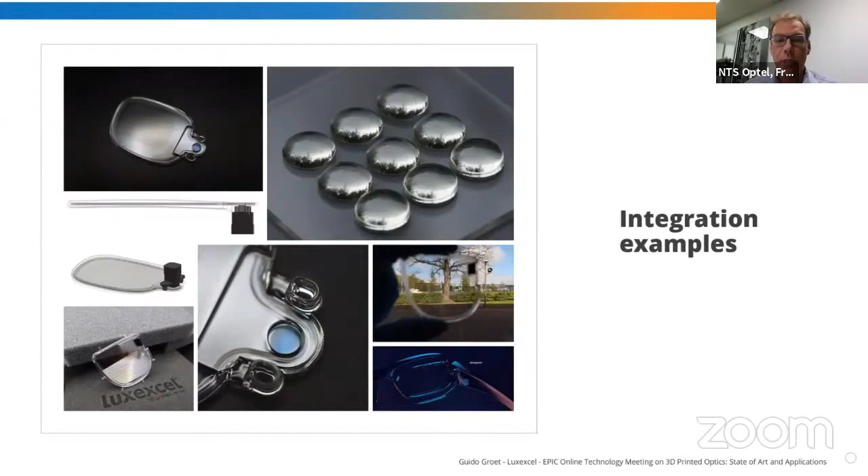Well, we build testers. Let me share my screen. Yes, please go ahead. I like that Epic members are always ready to share the screen. This wasn't prepared, Guido - he wasn't expected to talk, and now he's going to share what they do. Can you see my screen? Crystal clear. Go to slideshow mode so we can see it even bigger. Yeah, but then I might lose the screen share. Okay, go ahead, it's fine.

So what we basically do is test meta lenses, DOEs, or anything on a wafer. The tester, in detail, is very complicated, but in basic structure it's actually very simple. It's an XY stage that positions every lens or DOE on the right position for the laser. This is a very specifically designed laser for every specific meta lens - the wavelength, but also the beam shape, collimated or not collimated, is all adapted to the specific needs of that metastructure. From there, the metastructure makes its pattern.

If it's a DOE, of course, multiple beams. We use a projection screen to basically use it as an integrator, make an image of it, and process this image according to the quality requirements of the customer, and then you basically get a good or not good product. Of course, it's a little bit more complicated than that, but that's basically what we do.

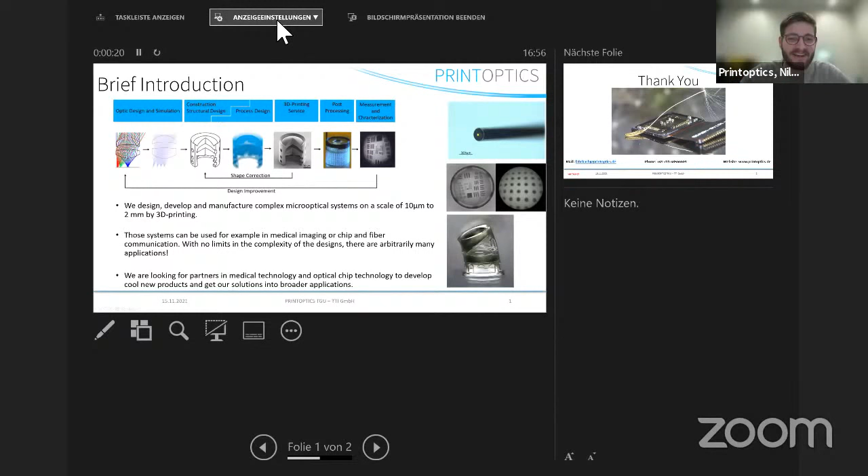Can you see my screen already? Yes. Go to slideshow mode so we can see it bigger. So I think you can see it in presentation mode now. Yes, you have to switch the display settings. Okay, can you see now? You're sharing the wrong screen with us, you're sharing the other screen. Oh I'm sorry. Okay, display settings, now I get there. Yes, very good, let me switch the screens. Display settings to the other one. Very good, so now you should see it in the right way.

What we actually do is we start with the optical design, the wave optical simulation if necessary. We incorporate the advantages and possibilities of 3D printing optics already in the design, because there are specs a typical optic designer would never think of, and we incorporate that into our design. Then we have the structural design, and there goes a lot into that because we've developed steps for post-processing, like getting apertures and mirrors into the systems at the sub-millimeter scale. For example, the system you see on the bottom right, that's just not possible to manufacture in any other way.

So looking at the previous discussion, I'm also very much team polymer, because the degrees of freedom we have and the little shrinkage, it's just awesome. We can offer the whole process from start to finish. We can measure the optics and supply you with, for example, optics directly on chips, on fibers, on glass substrates, on wafers, all of that. So that's what we do.

To answer the typical two questions in this round: what we can do for you is take your ideas and make real systems out of them. We just need the specs you want, and we do all the rest. And what you can do for us: we're actively looking for partners, especially in medical technology and optical chip communication, fiber communication technologies, to develop cool new products and get our technology into your product roadmap in the early stages.

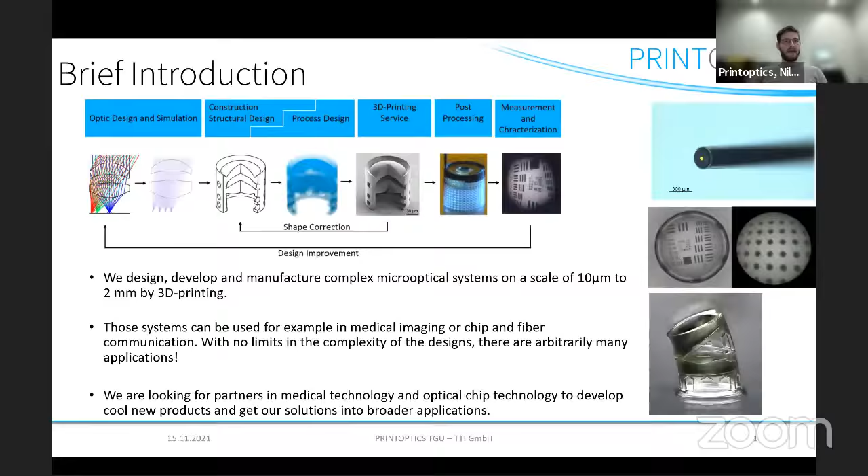And I think we could help each other out in pretty cool ways. You are already having a successful collaboration with Nanoscribe. I would really like to see there is a potential cooperation with others. But Guido, I want you to discuss this, of course, not in public.

We have another company in the room that is the first time they come to an EPIC meeting, and I would like to give them the last word of the meeting. I'm obviously talking about the company that is on the end user side, Bachler.

Bryce Turing came as a spectator. He wanted to learn and listen about 3D printed optics. Bryce, we've been talking about 3D printed optics for 2 hours. As an end user in the process industry, what is your take? Maybe you have some questions, suggestions, room for cooperation with any of the participants today.

Good afternoon. Thank you for letting me talk. I was more joining this meeting for curiosity at first. We are mostly interested in lighting applications and freeform optics, so relatively large optics. We are not a large volume manufacturing company, so the 3D printing aspect is interesting for us in terms of rapid prototyping, or eventually illuminations instead of having a tool made for molded optics. That's something I was quite interested to see, if there was already technology available for this type of rapid prototyping for illumination applications mostly.